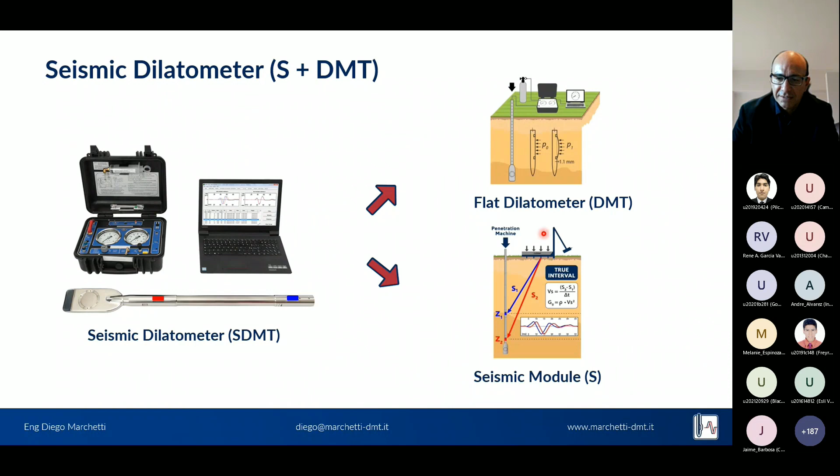Now, the seismic dilatometer I want to introduce is the combination of the flat dilatometer invented by Professor Marchetti in 1980 and the seismic module for measuring the shear wave velocity and also compression wave velocity. These two instruments can be used alone or in combination with each other, and we will see that the seismic has also been combined with the CPT.

Let's start with the DMT first. The DMT is a stainless steel blade with a flexible membrane mounted on one of its sides, which you see on the right side of this slide. The diameter of the membrane is 60 millimeters.

The test consists of advancing the blade into the soil using penetration rods for pushing the instrument and a penetration machine for advancing the instrument in the soil with pressure. A pneumatic electric cable runs from the control unit at surface into the rods and down to the blade at depth. A gas tank is necessary to provide the pressure of air, or even better nitrogen, but you can use either one. A computer may be used...

...in case you want to obtain real-time processing of the results and see the results already. If not, you can simply write them down and take the pressure readings from the control unit without the computer. Now, the test procedure consists of advancing and stopping every 20 centimeters.

As soon as the blade is advanced and stopped, initially the total horizontal pressure of the soil will flatten the membrane against the support behind it. The operator will use the valve on the control unit to inflate the pressure, and the gas that runs in the pneumatic cable will start to inflate the membrane from the inside.

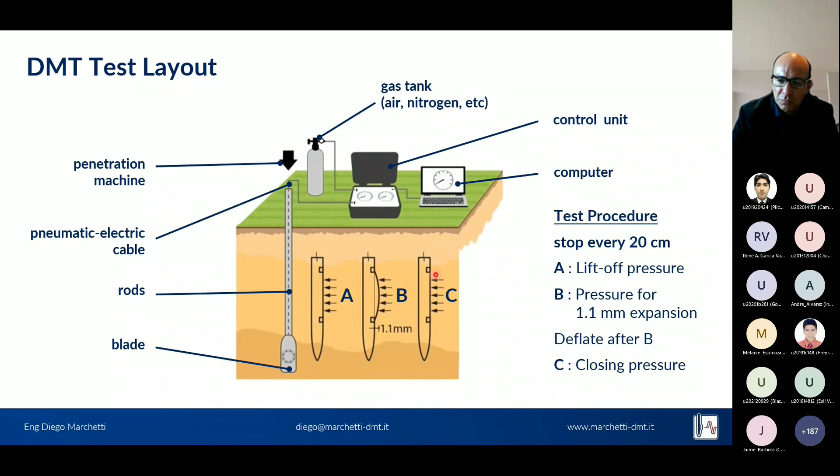The operator then has to deflate after B, otherwise the membrane will overexpand and explode or be damaged. If the operator deflates with a slow vent valve, you can take the C reading, which is very useful in sand. The C reading is when the membrane returns to its original flat position before A.

To summarize this: when we push the blade, the soil pressure is flattening the membrane. We start to inflate the gas from the inside. When the membrane starts to move, a contact goes off and the A reading is taken. The operator continues to inflate, the membrane expands, and when the expansion is exactly 1.1 millimeter in the center, the contact goes on again and the B reading is taken.

It is then necessary to deflate, the signal will go off, and when the membrane returns to the flat position at the beginning of the test cycle, the contact will go back on and the C reading can be taken.

The DMT test consists in taking 2 pressure readings, or 3 if you also do the C reading, every 20 centimeters, normally up to 20, 30, or even 100 meters.

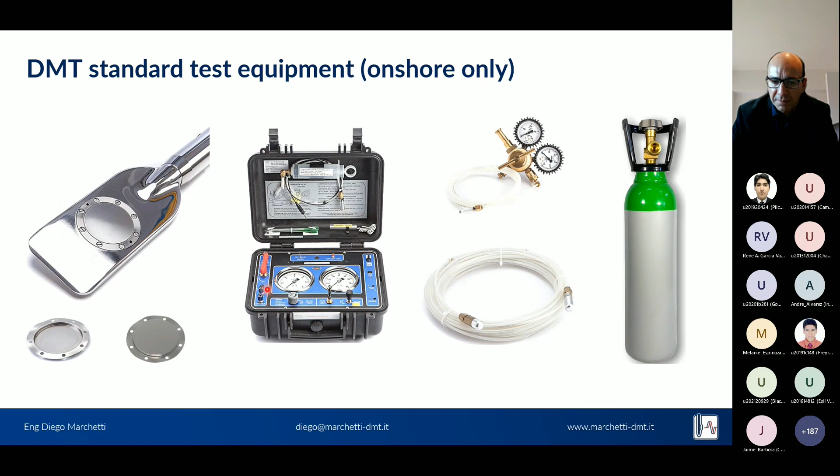This is a picture with the main components of the DMT: the membrane, which is already mounted on the blade, the control unit, the pressure regulator for the gas tank, the pneumatic electric cable going from the control unit into the rods and down to the blade.

The seismic equipment, which has been added recently also to the Medusa DMT, consists of an additional electronic board compared to the Medusa that acquires the signals from a top sensor and a bottom sensor.

The test consists in generating a shear wave at surface using a shear beam, which must be energized with a horizontal blow of a hammer against this shear beam to generate the shear wave. The shear wave will travel at depth and arrive to the top sensor and to the bottom sensor.

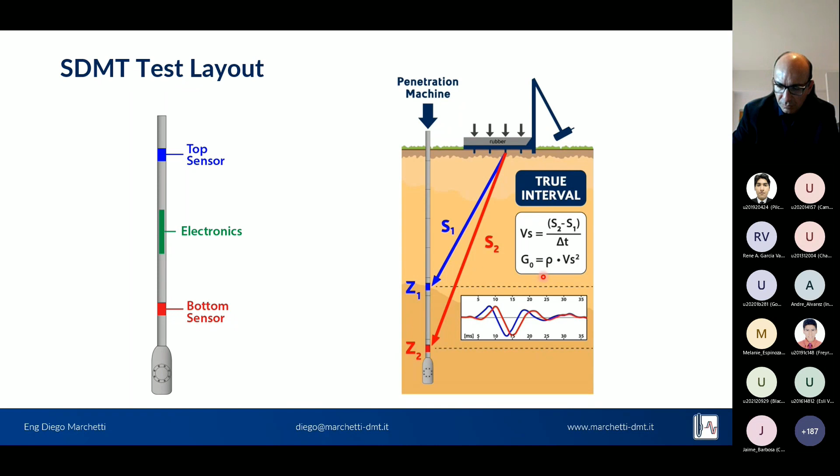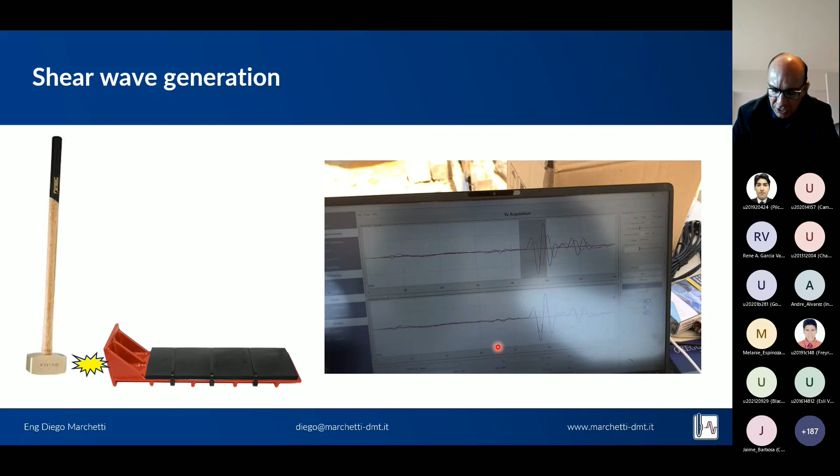Just to show you how simple it is, you have to click on the acquisition button, give a hammer blow, like in this video, and you will see on the screen the delay of the wave in the registration. The system will evaluate the delay and show you how well the delay was evaluated, superimposing the waves, and give you a real-time evaluation of Vs.

Normally, and this is what you see on the screen, you repeat 2 or 3 times so that you are sure you get a very high repeatability, which is below 3, 4, 5%. In this case, it's even less than 1%. And this is done every 0.5 meter because the sensors are spaced 0.5 meter.

The main features of the SDMT are that the execution is quite rapid because you don't need to drill a hole if the soil is penetrable, and you don't need to wait for the cementation of the hole as for crosshole or downhole. You just push the equipment like for the DMT and do the seismic test in addition to the DMT.

The accuracy of the evaluation of the delay is very high for several reasons. The first one is that the electronic board is a custom designed acquisition board that digitizes the signals so that when they are sent at surface, the data may not be corrupted and is of very high quality and free of noise. The signals are amplified and digitized at depth, so you have clear waves and a very consistent delay delta t.

But very importantly, the system has 2 receivers versus the old systems that have only 1 receiver. If you have 2 receivers, you are looking only at the delay between the waves, the same wave arriving at 2 different depths. If you have only 1 sensor, you have to record a first blow to the first sensor, then go to the next depth and be as accurate as you can to give 0.5 meter or 1 meter depth.

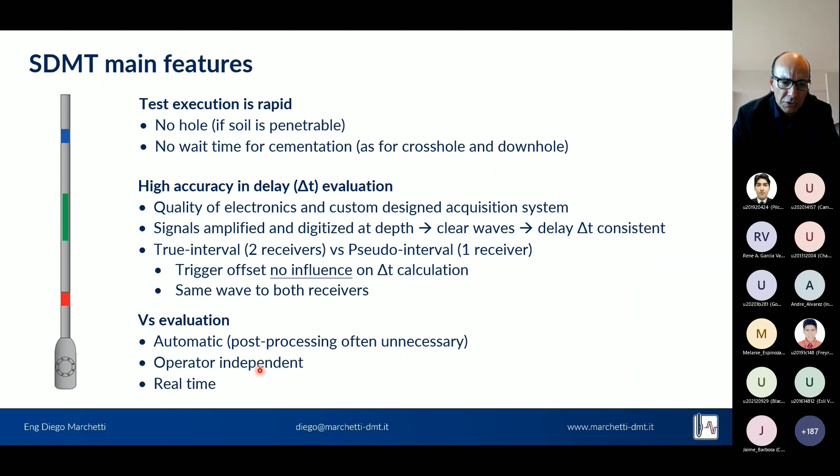The evaluation of the shear wave is automatic. Often the post-processing is unnecessary and the real-time evaluation of VS is perfectly the final value. Only if you are very close to a power station or a train station where you have vibrations, you have to use a little bit of post-processing to filter the results. But in 95% of the cases, the results you get in the field are already the final results. The test is operator independent, provided that he does the setup as explained in the training given, and the results are available real time.

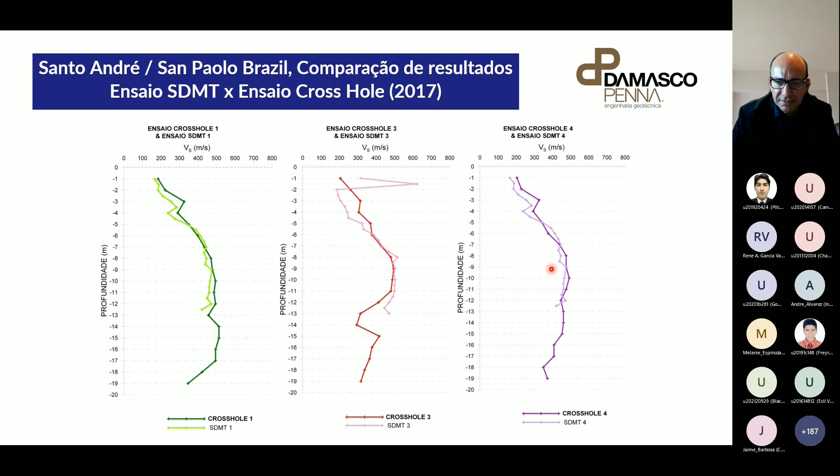The SDMT was very well accepted by the community of geophysics and shear wave velocity, to the point that we were asked to combine the SDMT, or the seismic part only, without the blade, also with the CPT. Currently we have three partnerships, and we are working on a fourth with Van den Berg, in addition to Geomil, Pagani, and Gouda Geo, to make the SDMT cone, which is the CPT with the SDMT. There is no limit in combination of the SDMT with other CPT systems, because the seismic is completely independent from the CPT measurement.

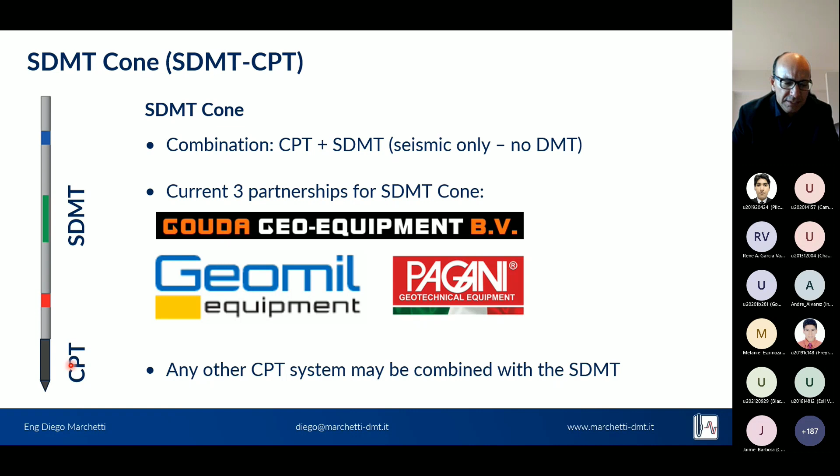Now let's look at the machines with which you can normally advance the DMT blade. The DMT can use all the machines that are used for advancing the CPT. In particular, the heavy truck penetrometer, which is the most productive because it is able to push up to 25 tons without lateral instability. Yet it is very expensive.

Additional solutions include small penetrometers, like this one used in Costa Rica, that can push the DMT. It's a lighter penetrometer, but it has to anchor, because if it pushes, it can push also 15 or 20 tons, but it would go up. So the anchors are used to get the reaction force from the ground.

The DMT or SDMT can also be advanced dynamically, only the DMT, because the seismic can get damaged if you use all the power of the hammer. But if you use only a small part of the hammer blow, you can even advance the SDMT dynamically. However, this is not recommended in extremely soft soil, because the disturbance of the dynamic will be higher and have an influence on the results. But if you use the hammer very gently, because the soil is soft, you can advance without disturbing too much and have excellent results.

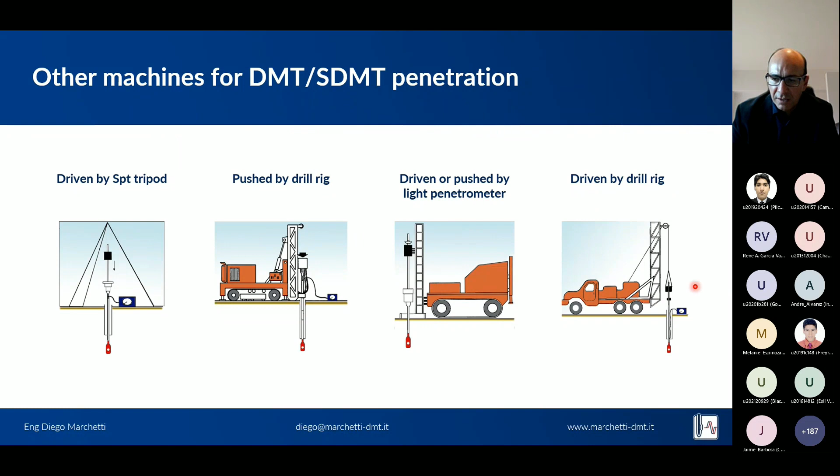Or using a drill rig from the bottom of a borehole, just like an SPT, but pushing or even dynamically from the bottom of a borehole. You can use basically any method, as long as you get the blade into the virgin soil. If you want to use a drill rig, you have to use the method called torpedo. The torpedo is the combination of a blade with an adapter, three or five penetration rods according to the capacity of the drill rig, and a top adapter for allowing the cable to pass inside the penetration rods and come out from this hole protected against a slot, so that the cable does not get damaged when it exits.

And then the cable is taped to the drill rods. So you drill a borehole to whatever depth you want. Normally you use casing to avoid the hole closing, and then you lower this connected torpedo with the drill rods, taping the cable to the rods, lower it to the bottom of the borehole and push every 20 centimeters. When you reach the full length of the penetration rods, 3 or 5 meters, you then take away the instrument, disconnect the torpedo without disassembling it.

You keep it assembled, you only get the cable and put it on the side. Then you drill, you advance the casing, and you continue with the same test cycle below. This methodology is certainly slower than the penetrometer, because you have to alternate the drilling and the measurements. But it is able to overcome obstacles because you can drill through them and continue below.

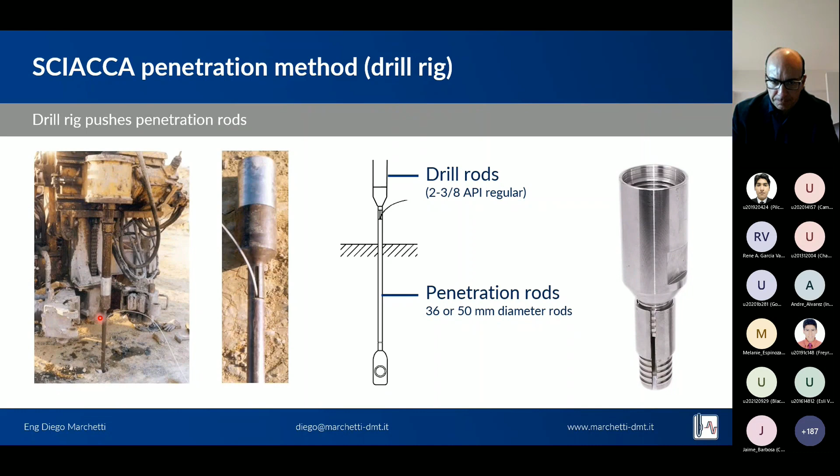Another example is to do the test offshore from a floating barge. In this case, you have the Sdmt and the seafloor hammer. This barge was anchored at the four corners with buoys. Then, using a drill rig, we did tests up to 50 meters of water, also with the hammer taking the shear waves.

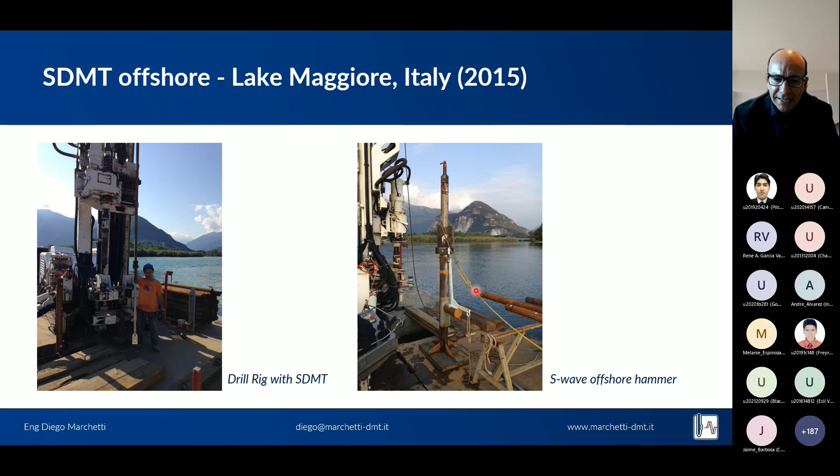Now let's see the type of soils for which the DMT and Sdmt may be employed. The DMT can be employed in all penetrable sands, silts, and clays, where the grains of the material are small compared to the diameter of the membrane. This means from very, very soft soils with low values of strength and moduli, up to hard soils, up to almost soft rock with high values of strength and moduli.

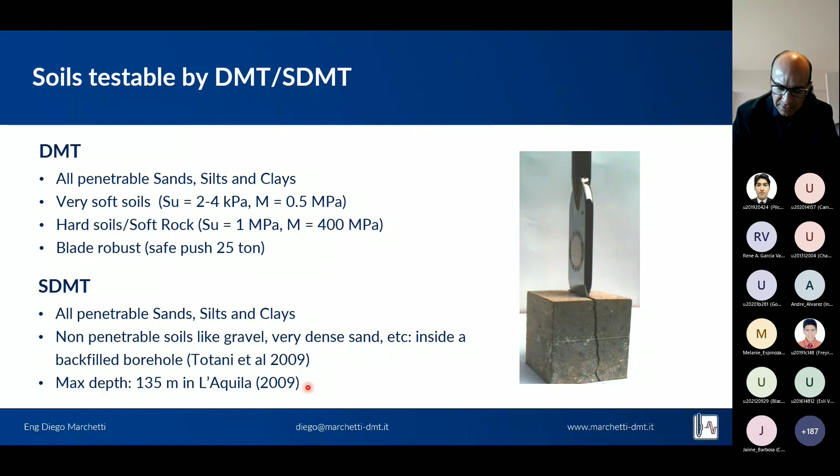The max depth we reached was 135 meters in the town of L'Aquila in 2009, after the terrible earthquake that occurred. Now let's look at the interpretation of the results, first of the DMT and then of the seismic.

So we said that we come from the field with DMT readings that are 2 or 3 pressure readings every 20 centimeters. How do we obtain geotechnical parameters for design? How can we use this information?

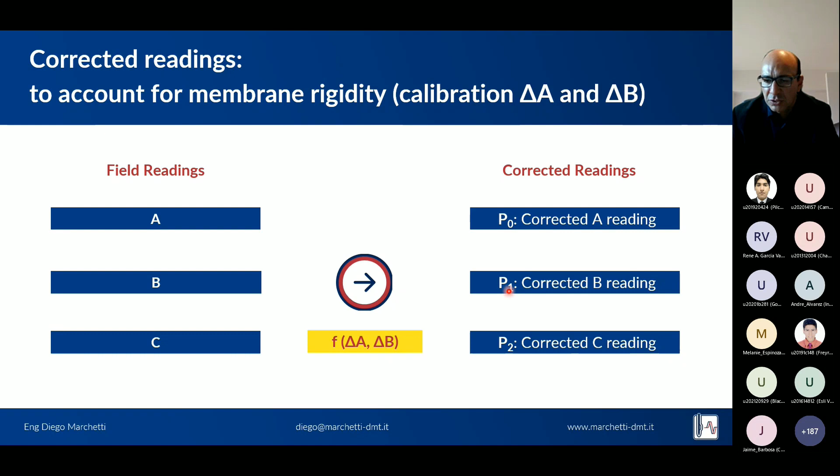The first step is to apply to the field readings the correction of the membrane. The membrane has a rigidity, and through a calibration that evaluates delta A and delta B, which are basically A and B readings out of the ground. I'm not going to go into this technical detail, but you correct the A, B, and C so that you eliminate the steel rigidity of the membrane and get the clear corrected readings of A, P0, B which is P1, and C which is P2.

The second and most important step is the definition of 4 intermediate parameters. The nice thing is that each one of these already has a meaning related to the soil: the material index for information on soil type, the horizontal stress index KD which has information on stress history and horizontal stress, the dilatometer modulus which is related to the modulus you can use for settlements, and the constrained modulus that we will see in the next slides, but it's not directly usable ED, though it is a modulus.

I will explain this in the next slides. And UD, which is a parameter coming from the C reading, the corrected C reading, is used for distinguishing between

drained and undrained soils. Now, the second step, or the third step, the most important, is to use correlations, not definitions, from the intermediate parameters to the final interpreted geotechnical parameters that we know well because we use them in soil mechanics. These were obtained by Professor Marchetti when he went all over the world to many research test sites that were very well documented.

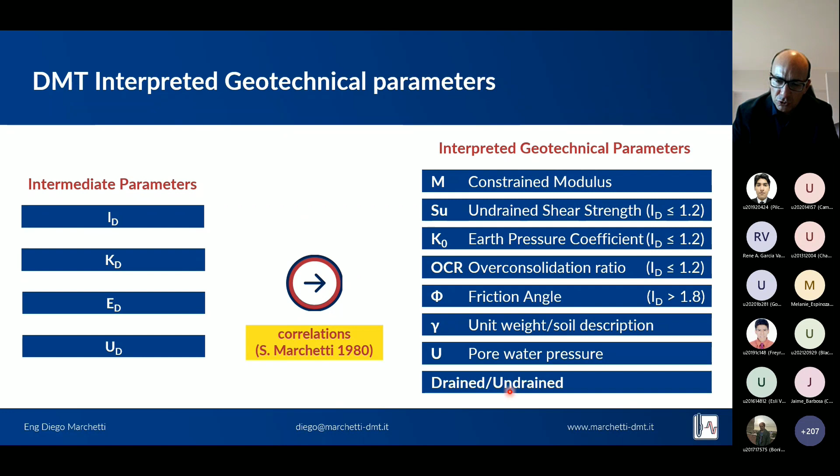So he constructed and processed the best correlations to these parameters using the information contained in these four intermediate parameters to get the constrained modulus M, the undrained shear strength in clays, the earth pressure coefficient in clays, the overconsolidation ratio mainly in clays (ID less than 1.2 indicates clay or silty clay), friction angle in sands, unit weight and soil description in all soils, the pore water pressure in sand, or excess pore water pressure in clays, and distinguishing between drained and undrained materials. So a lot of information, and I will show you how this is obtained.

Now let's look at the intermediate parameters. ID contains information on soil type, and you will see this because if you do a test and you do the A and B readings, or P0 and P1, you will see that the ratio P1 over P0 is about 1.1 to 1.3 in clay. Whereas if you are in sand, the ratio is about 2.5 or even more. In silts, it is somewhere in between. So ID has been defined as P1 minus P0 normalized to P0 minus U0, and it distinguishes very well between clays, silts, and sands.

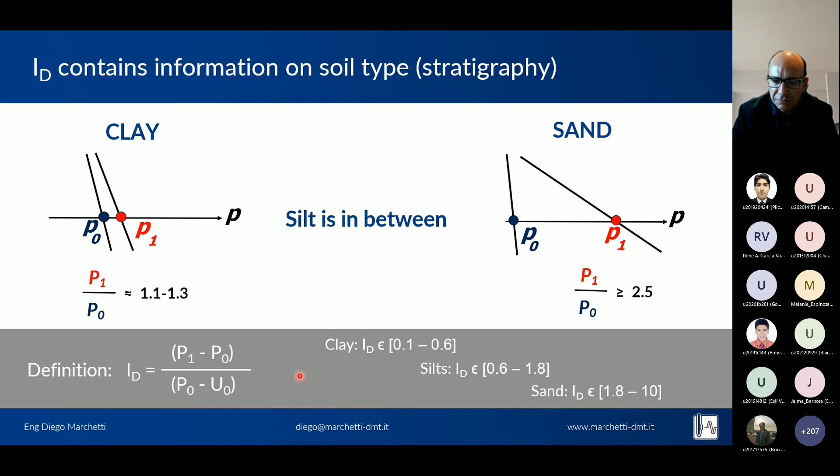The second intermediate parameter is KD, the stress history index. The formula is the same as for K0. P0 is basically the total horizontal pressure of the soil against the membrane minus the water pressure, so it's the effective horizontal pressure, divided by the effective vertical pressure. So that means that KD is equal to K0. Unfortunately, it's not true, because you have penetrated with the blade and created an extra horizontal stress, so P0 is not the total horizontal stress.

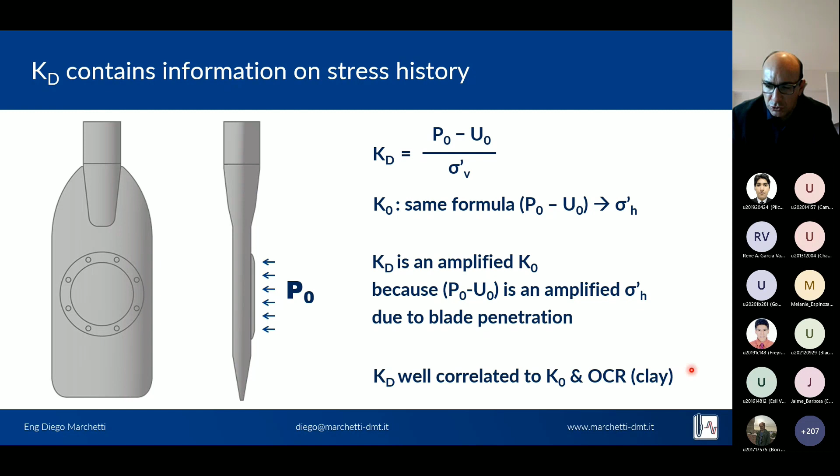However, in clays, this is the closest measurement you can do to get K0, and KD is very well correlated to K0 and OCR, and I will show you this in clays. In sands it's not so simple, and I will talk about this later. So when you are in a normally consolidated clay, KD is equal to the value of 2 - it's not small in general, it's equal to the value 2. In over-consolidated clays, the value is higher, and the higher it is, the higher is OCR.

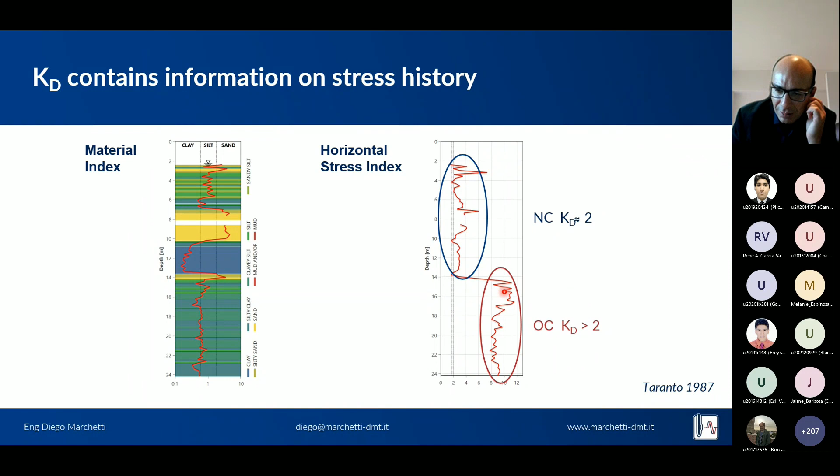Let's look at an example. This is a test site with silt, sand, and clays, and then a clay, a silty clay. You see in the top part, KD is very close to 2, and this is a normally consolidated layer of these different types of materials. And below 14 meters, KD is much greater than 2, indicating this well-known over-consolidated silty clay.

Professor Marchetti, using experimental data he collected in the 70s, published this formula in 1980 as a function of Kd to obtain OCR. There are several publications, among which this one in 1995, 15 years later, showing very good agreement between the correlation obtained from Marchetti in 1980 and the best fit of many other additional points.

You see that the best fit line, this continuous curve, is very close to the dotted line, indicating good agreement. Additional validations were obtained through theoretical publications by Finno and Yu, showing again very good agreement for this correlation between Kd and OCR, using very advanced and sophisticated models of the soil.

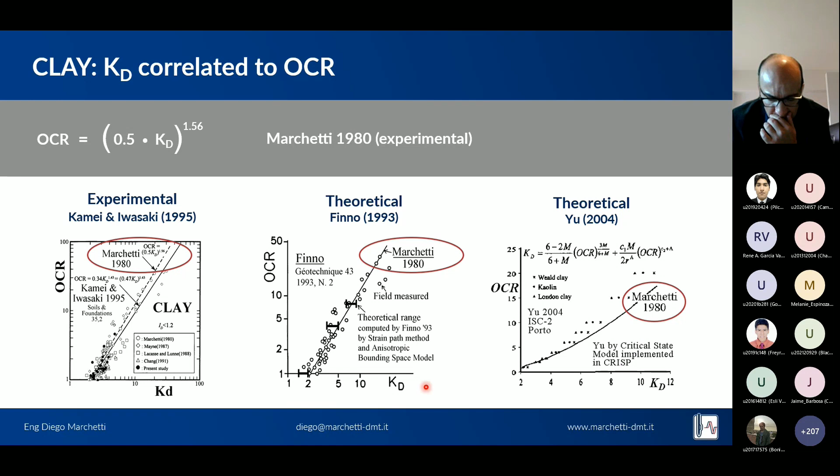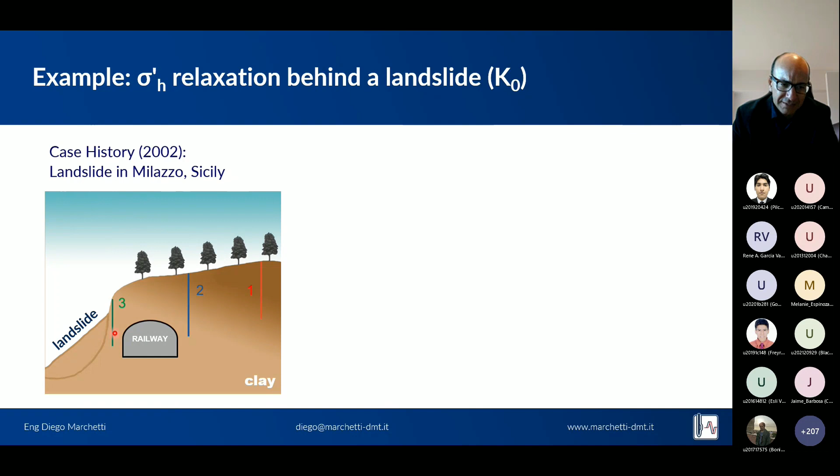The third intermediate parameter is ED, which is defined from the theory of elasticity. It's the elastic modulus obtained from the horizontal load test performed by the membrane expansion. With this well-known geometry, and accepting the elastic theory detailed in this publication, you obtain this formula: ED equals 34.7 times P1 minus P0.

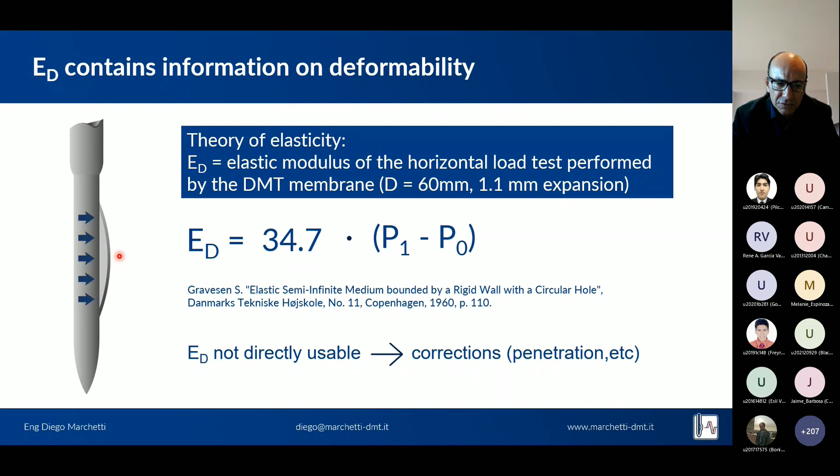This modulus is not directly usable for many reasons. First, it's in the horizontal direction, not the vertical. Then the soil is disturbed because you penetrated with the blade - certainly you disturb less than with any other equipment, but you still disturb the soil. And finally, it is an undrained modulus, at least in clays, while the constrained modulus is a drained modulus.

So the final constrained modulus you get from the DMT is obtained from ED, the dilatometer modulus, corrected with ID and KD, because the soil type provides information on the amount of drainage, in order to fill the gap between ED being undrained and M being drained. The correction on ED is different if you are in sand, clay, or silt. And KD is the stress history or horizontal stress, which helps fill the gap of information between horizontal and vertical stress.

So these three ingredients are well used in the formulae found by Professor Marchetti to use all the information available with the DMT to estimate the constrained modulus. There are many publications in literature showing excellent agreement between the constrained modulus M obtained from oedometer data and from the dilatometer.

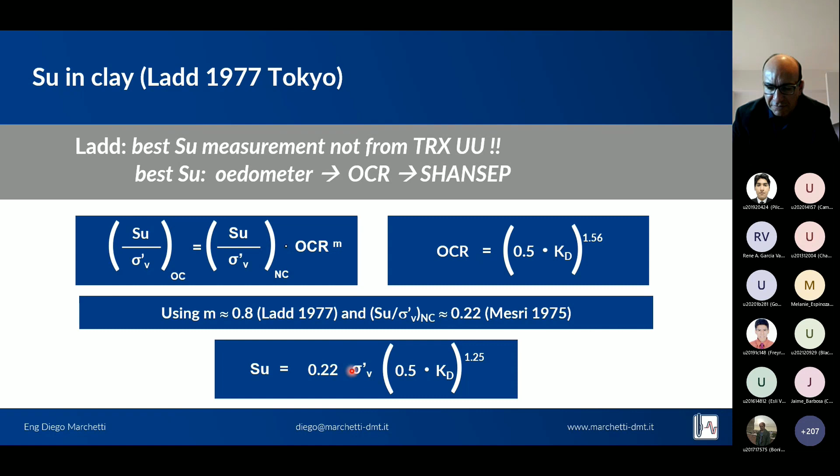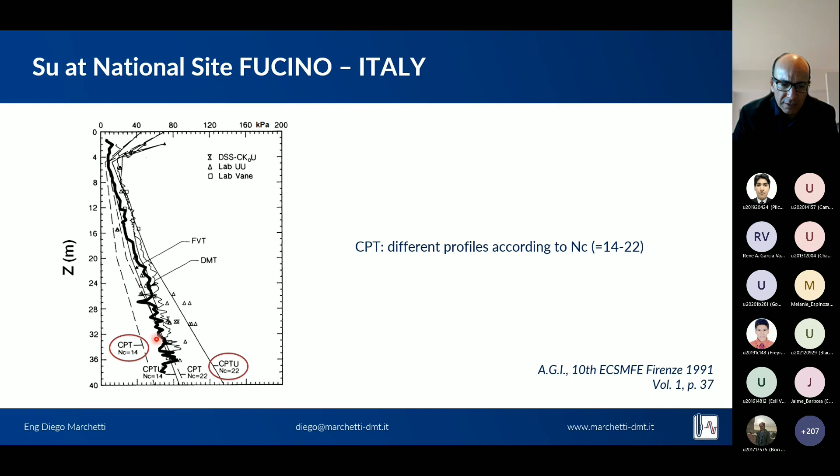This is the research test sites in Italy, where you see the various interpretations of SU from laboratory and from field vane tests, and also from the CPT, where according to the NC value, you have these different profiles. The DMT, fortunately, does not require any type of correction, as shown by the formula I just presented.

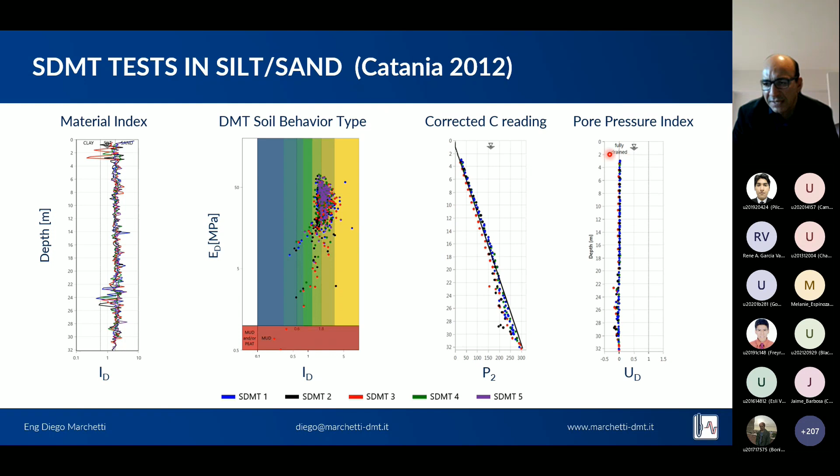Now let's look at the last measurement you can do with the DMT, at least with the standard equipment. With the Medusa you can do some others, but we don't have time to look into them. The idea is to do a dissipation test for estimating the coefficient of consolidation and permeability in clay.

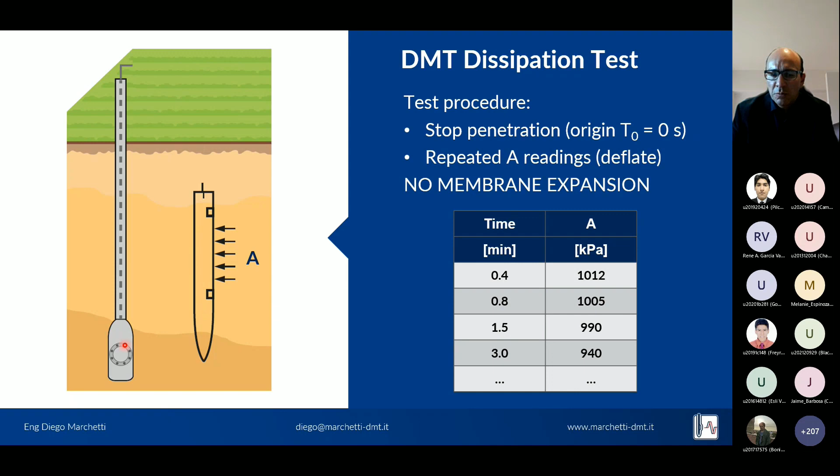The test consists in advancing the blade just like a normal test reading, and you stop. At that moment, you have created an extra water pressure due to the insertion of the blade, which increases the horizontal pressure, and in clays creates an extra water pressure. So the time starts when you arrive at the test depth, and you repeat only A readings, which are basically the total horizontal stress, without expanding the membrane. So you have time and A, and the blade is not moving, of course. We already created the excess pore water pressure. We want to see how fast the water dissipates.

So if you take the readings at double the time, because the scale is a log phenomenon, it will design an S-shaped curve and create a flex point that has been correlated to the coefficient of consolidation, as you can read in the publication of Totani et al., many years ago, and now it is well accepted. From that, you can obtain also the coefficient of permeability, KH, as a function of CH, gamma water, and of course, the modulus that you can get from the DMT.

You can do the test also with the cone, of course, and we compared several dissipations, but the main difference is that, first of all, you disturb the soil less with the penetration of the blade. Second, you don't measure in one point, but in a larger area, like a small embankment. So it's very similar to the consolidation and permeability of a small embankment in front of the blade, which makes it reliable because it's not only a single point, but an average of the bulb of soil involved in the membrane surface.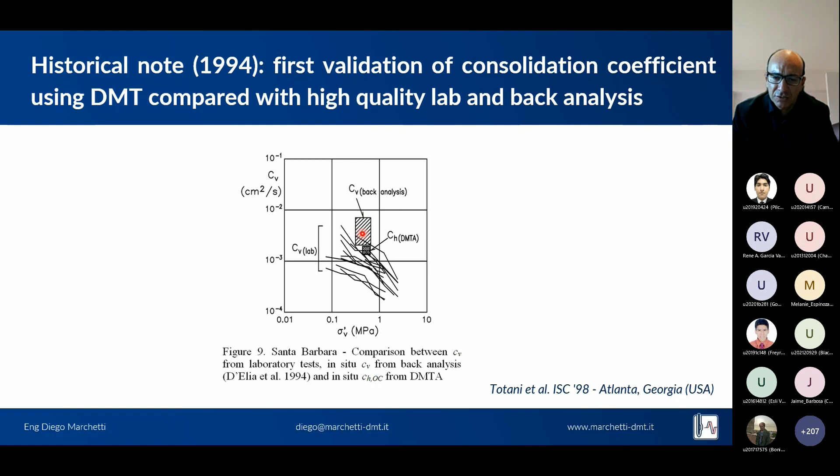As a historical note, let me show you comparisons of this CH with laboratory results of high quality in this real case project that has been published, along with the back calculation after the construction, showing excellent agreement between all 3 values.

Today, with the automated Medusa, we don't need to take only points. We have full continuous, very high resolution A readings, and we get the full curve automatically without needing to take the readings manually. And from that full curve, the flex point provides you the coefficient of consolidation, and from that, the permeability.

The DMT is encoded in the European standards according to Eurocode 7, the ISO standards since 2017, and American standards since 1990, with several revisions and updates. The most complete document is this TC16, named because it was written by the Technical Committee 16 of the International Society of Soil Mechanics and Geotechnical Engineering. Today this committee is called TC102, but the document is still called TC16. It contains 41 pages on the testing equipment, test procedures, and processing of results, most of which I addressed in this presentation.

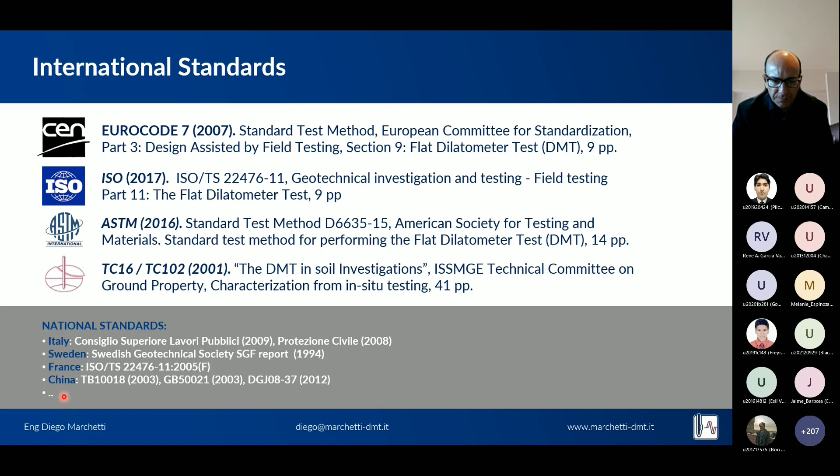Now let me show you some results to get confidence with how to read the graphs you obtain for geotechnical design and applications. Here we are in a test with clay near the airport, Fiumicino, where they constructed the new exhibition center, but not quite well. We are inside the pavilions, where we did a test. The reason for the test was that they had a lot of problems because they put the perimeter on piles and then did not do a good job for the rest—they dug out and put gravel, but I don't have time to go into these details. I just want to show you the results.

These are the P0 and P1 readings, so maybe you can already predict we are in clay mainly because the readings are close to each other and not far apart. Maybe here we have some sand, but we'll see this later in the intermediate parameters. These are the field readings corrected with the calibration. The C reading shows the excess pore water pressure in clay, and you have some nice sandy layers that also define your hydrostatic water line. This is the unit weight obtained with the chart I showed you before. So this is the input and field readings.

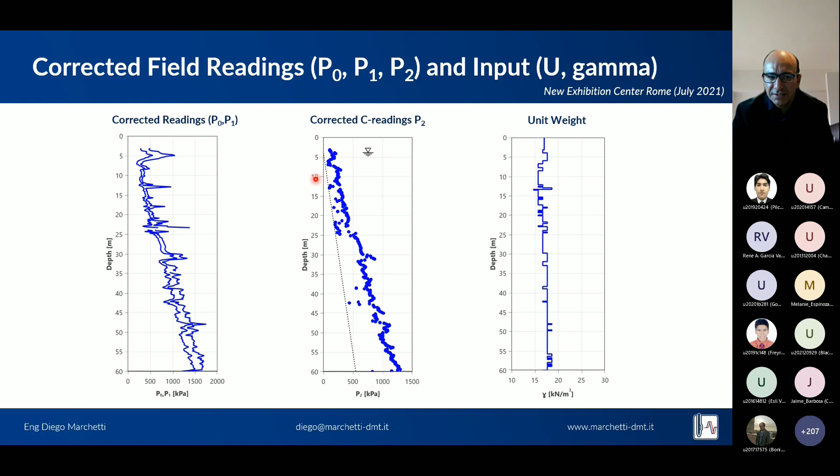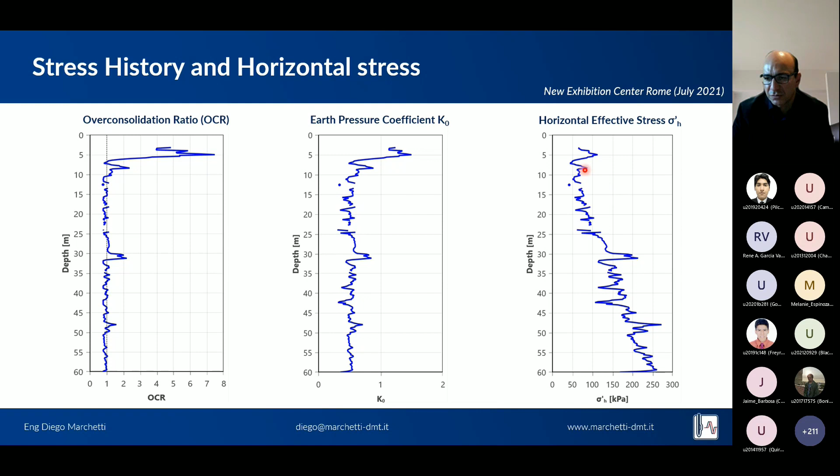We also did a dissipation test at 35 meters, and in this case it was very slow because it's clay, as you know from the profile before. T-flex is around 100 minutes, and this gives the coefficient of consolidation and permeability.

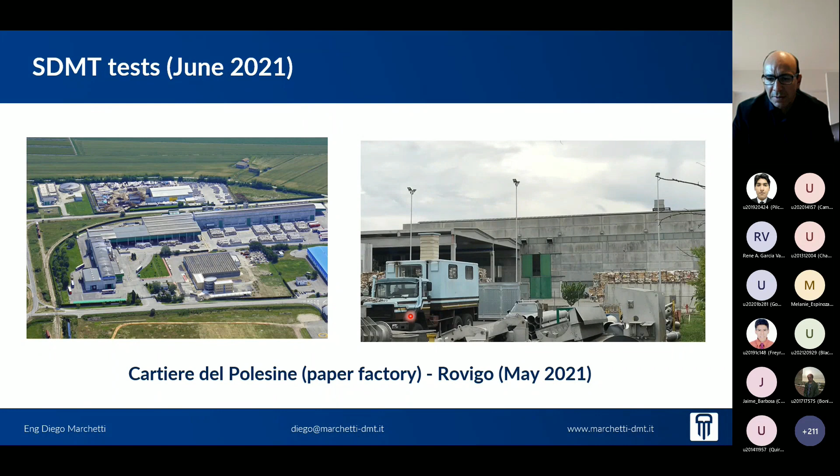Now let's look at an example of these tests in clay, silts, and sands, not only mainly clay. This is a paper factory in the northeast of Italy. They have to construct another building in this area, so we went with our truck and did the SDMT tests with the Medusa.

KD is greater than 2 in the sand, so probably the sand is quite dense, and the clay is mostly normally consolidated because it's equal to 2. And the dilatometer modulus, the one we have to correct to obtain the constrained modulus, and again the UD, where we have UD equal to 0 it's fully drained behavior, and where we have higher values it's undrained.

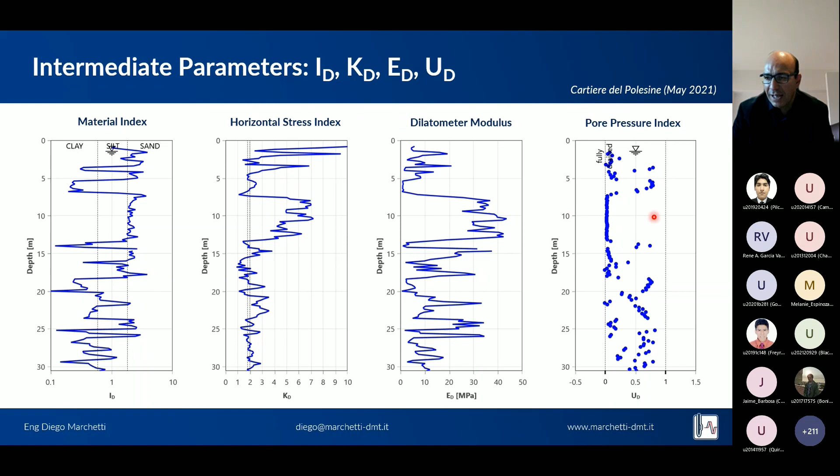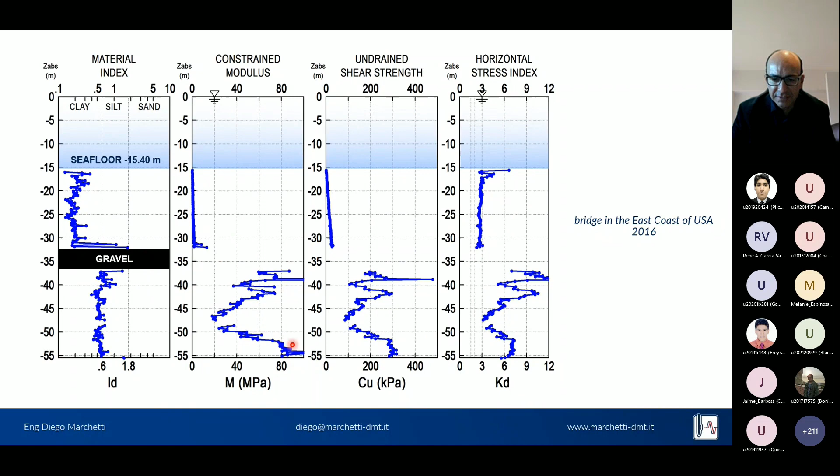This was a test in the northeast of America, for a bridge project. This was the seafloor system, with a seafloor hammer for generating the shear waves. As you see, the soil was very soft for the first 15 meters, and then there was gravel that we had to drill through and go on below for a silty clay that had this profile with the DMT.

The nice thing was that they did also tests with the pressure meter and with the CPT. They actually calibrated the alpha value of the CPT using the DMT and the pressure meter. And here you see an excellent agreement between the tests for the modulus and also for the undrained shear strength.

Now let's see what are the main differences between the DMT and cone-shaped probes like the SPT and CPT. For the CPT, one of the first differences is that the test is performed during what should be a fixed penetration rate of 2 centimeters per second, which means you have to impose, monitor, and make sure you are respecting it. This requires necessarily a penetrometer, and the penetration rate, if very different from 2 centimeters per second, can influence the results. For the DMT, there is no specific requirement on penetration rate because the measurements are performed when the blade is not moving, so it doesn't really matter how fast you go to the test depth.

We are doing advanced research for a small family of silts where this statement is not true, because it's a partially draining material. So it's a small family of silts, and if you go fast you get higher readings, if you go slow you get lower readings. But in clays and sands, silty clays and silty sands, and most silts, you don't have influence of the penetration rate, and the measurements are independent of such rate.

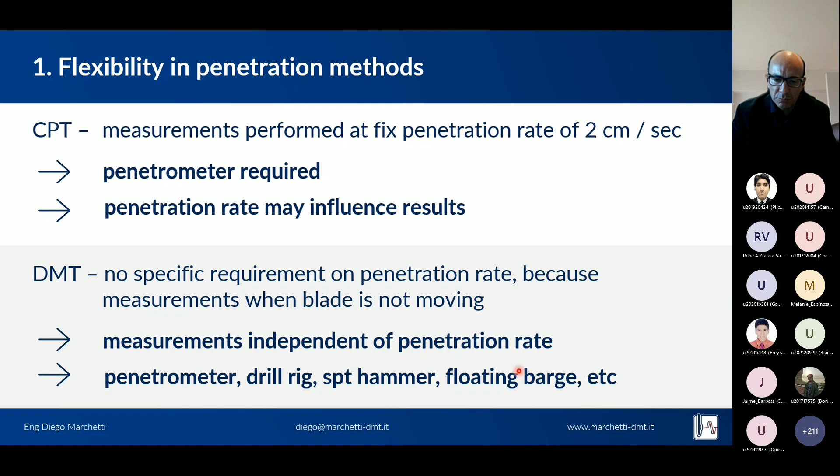A second important difference between the DMT and the cone-shaped probes is the disturbance. When you penetrate with the cone, you disturb the soil because you fail it. With the blade, you cut it and only slightly disturb what will be in front of the membrane. So the DMT during penetration preserves better the original state of the soil, meaning soil parameters are more representative and do not require a correlation to fix from this damaged soil back to what was the original natural soil.

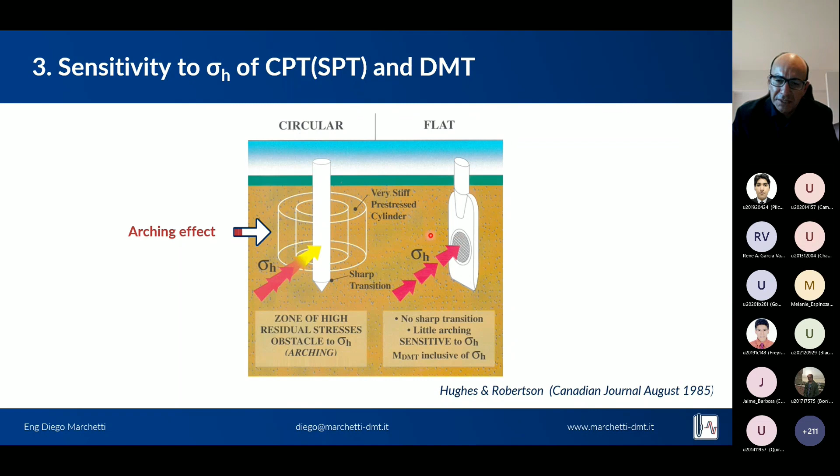Another important point is the horizontal stress. As published in the Canadian Journal, when you penetrate with a circular probe, you generate a very stiff pre-stressed cylinder, coming directly from the well-known arching effect, like in tunnels. But here it is an obstacle to the horizontal stress, because this stiff pre-stressed cylinder does not act on the shear or the friction sleeve of the cone, making it very insensitive. The relation between width and thickness of the blade is such that arching is very small in the rectangular section of the blade, so there is very little arching. Furthermore, we measure the soil in the horizontal direction, capturing completely the total and effective horizontal stress.

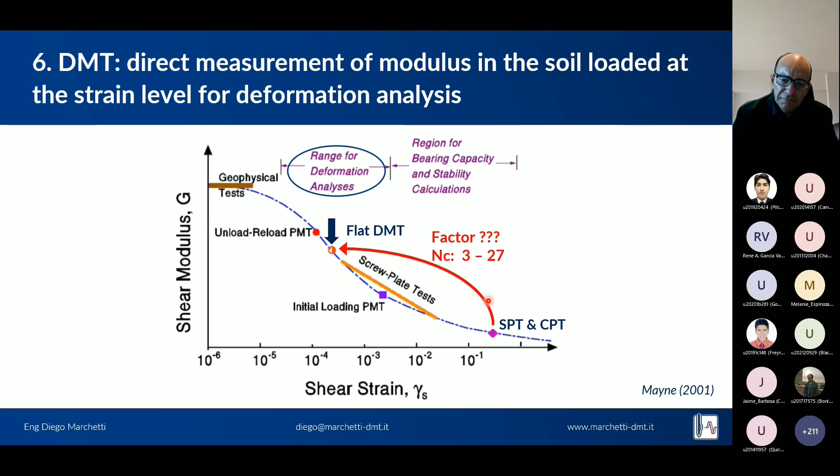But then, to obtain a modulus, they have to find a way to estimate a factor for that. Now this concludes the initial part of the presentation concerning the equipment, test procedures, and interpretation of the results. Now I would like to address several applications for which the DMT is used worldwide in everyday projects. The reason is not to tell you that the DMT can solve all your problems, but to show you how people use the results, so that if you have similar projects and a DMT profile, you know what was already done by others.

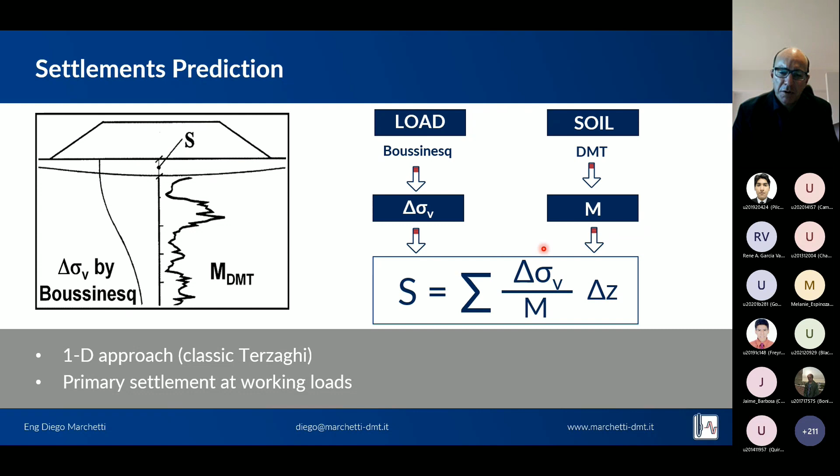The first application, and by far the main application for which it is used, is for the modulus, for example for settlements. We all know that a settlement is obtained from the load, where we could use Boussinesq to evaluate the excess stress caused by the load, and the modulus we can obtain from the DMT, and even with a very simple monodimensional formula, we can get a very average value of the settlement. Professor Marchetti used to say it's better to be approximately right than precisely wrong. So a simple monodimensional formula, instead of precisely wrong with decimals and many expressions accounting for secondary factors, when maybe we make a mistake with the modulus m because we estimate it wrongly, and then have a very big error due to the modulus.

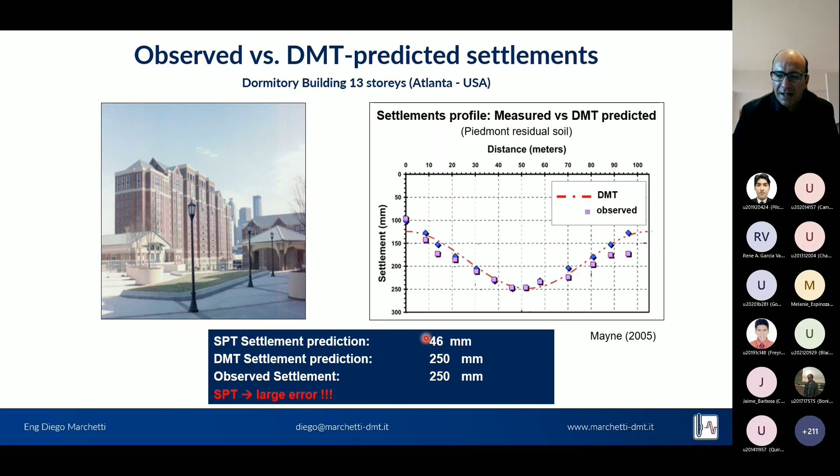You will find in literature many case histories showing very good agreement between the measured and DMT predicted settlements or moduli, and these are examples of publications. Just to show you a few, this is a comparison of observed versus DMT predicted settlements, showing very good agreement of the observed settlement with the DMT curve, where the SPT predicted a very unconservative value. Even though if you read the paper, you will see they made even a mistake in using the modulus, but definitely the SPT contributed to a very incorrect value of the settlement evaluation.

This is another collection of 107 projects where this user of the DMT published in Budapest at the last ISC International Site Characterization Conference, more than 100 projects where the DMT test data saved the owner money over the previously overly conservative design based on less accurate tests.

So basically, with SPT, they predicted they would have to do deep foundations. With the DMT, they predicted a higher modulus and were able to do shallow foundations instead. This is the sum of the saved values across all these projects.

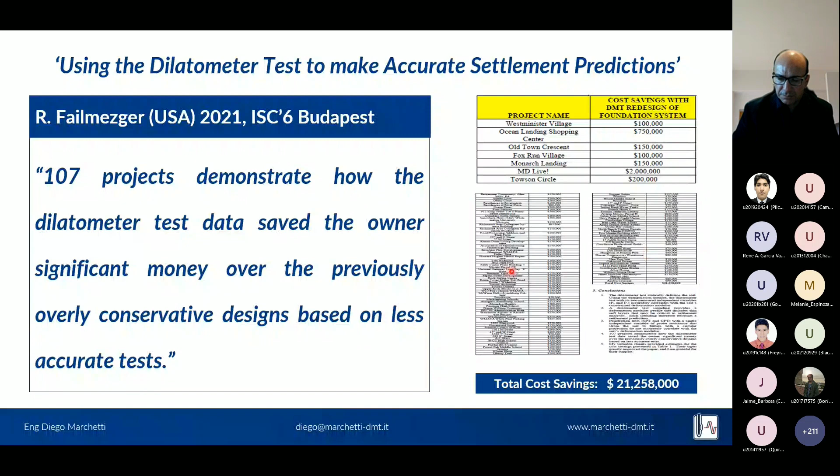Now, to show you an example, these were tests performed in Bogota, Colombia, in 2015 at the Escuela Colombiana. Some of you may have been present at the time, while myself and Professor Robertson were doing presentations similar to this one inside the main hall, while outside they were doing tests with the drill rig and with the DMT and SDMT equipment.

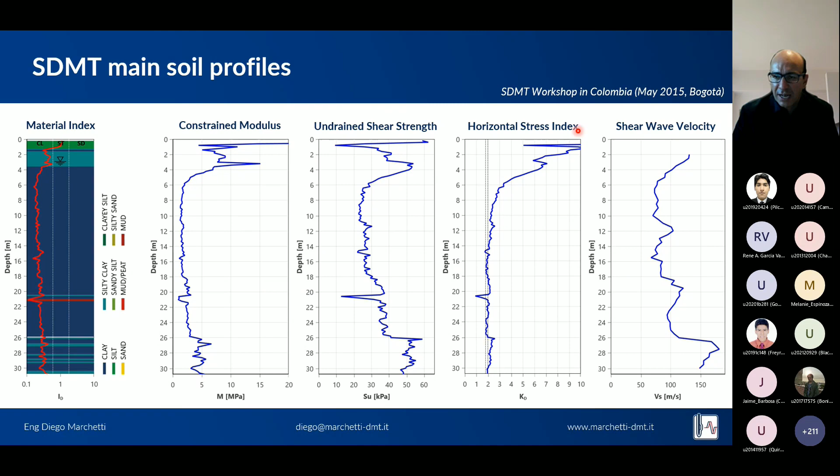The KD had a value of 2 from 8 meters onwards and much higher at the surface. This was the shear wave velocity. As you see, there is a very dense top crust in the first 8 meters, and that's why OCR and K0 are very high. Then in the clay, OCR is equal to 1 and K0 is again equal to 0.5, which is typical of normally consolidated clays.

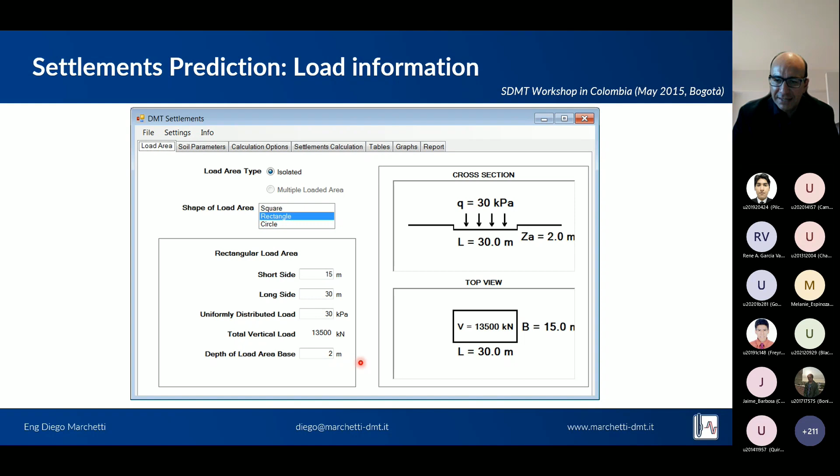We decided to do an example of settlement prediction with a rectangular area, using software that is free, provided by us online, where you define the load area, in this case a rectangle with these dimensions and this uniformly distributed load, with the base dug up for the first 2 meters. Then you can import the soil parameters, in particular the modulus every 20 centimeters, and immediately get an evaluation of the estimated settlements in the center, the 4 corners, and the median sides.

You can also access the graph where you have the modulus from the DMT test, the Boussinesq evaluation of the increase of stress from the 2 meters that we dug out, and then the resulting deformation. From that, if you integrate the settlements, you obtain a settlement at the top of 225.5 in the center of that load.

Now, let's look at another application, G-gamma decay curves. We already saw the graph of the decay of the modulus G with strain, and we already saw that the DMT provides a modulus in this area. So with the seismic test, we have Vs and therefore G0, giving us the first initial point.

Using that, along with the DMT modulus, we can try to estimate the curve. If we have a low ratio of G0 over M, it means the curve is more like the top curve. If we have a high value of G0 over M, then the curve will decay quite rapidly.

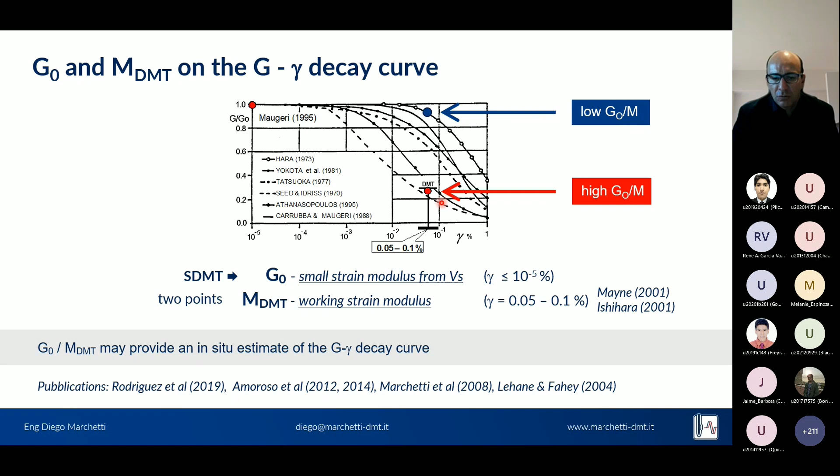There have been several studies on this, and Dr. Sara Amoroso published this research in 2014. She worked with several test sites, using intersection because she knew G0 from laboratory, and found the gamma from the DMT at certain points.

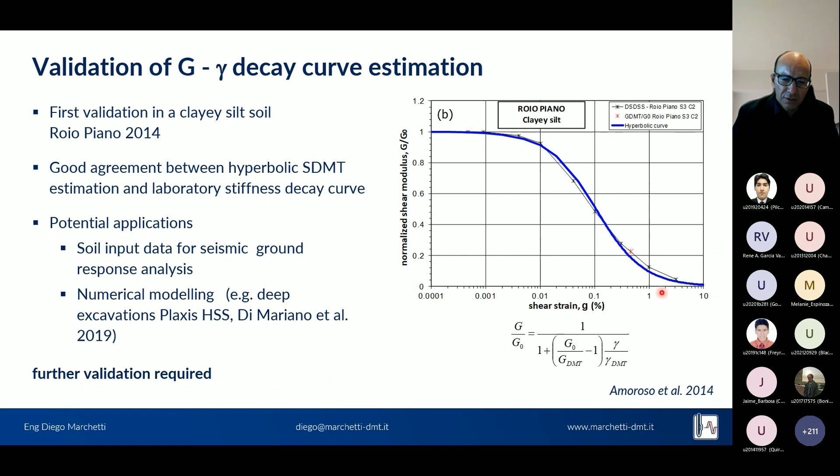We don't have time to go into this, but the first validation curve worked very well. Additional work will be shown maybe later in this presentation, and of course further validation is required. But yes, it's a very interesting application, especially for numerical modeling programs like Plaxis that require this type of input.

Now let's look at another application for which the DMT is used. The DMT has been increasingly used in compaction jobs to quantify the gain of soil improvement, be it ground reinforcement, ground improvement, or ground treatment. The first publication was in 1994 by Professor Van Impe et al. They tested before and after vibrocompaction and saw that KD increased 4 times, while the modulus M increased 10 times in the compacted area. The nice thing is they showed the compaction was efficient only up to 8 meters, because below that the profiles were the same.

Another example, in the United States, a project at a school did resin injections and wanted to check that between 1.5 and 3 to 4 meters, they had an improvement of the soil in terms of KD and M.

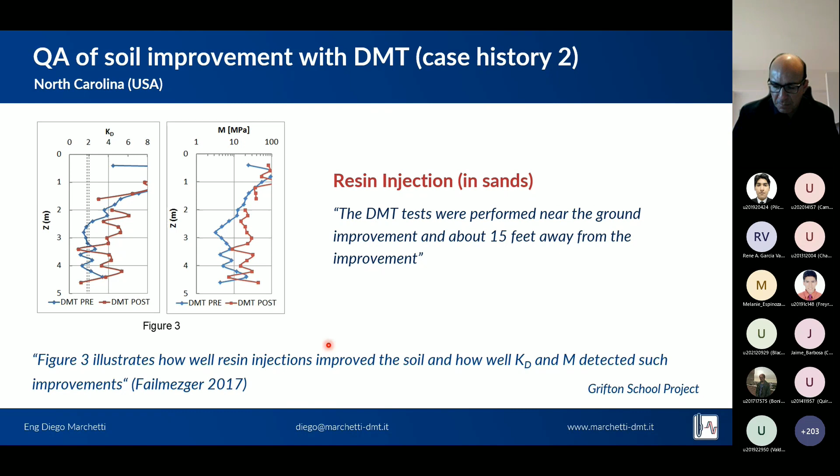Another example is on this island in Dubai. You may have heard of the Palm artificial island, created with land reclamation techniques, with ships pumping sand and then compacting it. They wanted to ensure the sand was well compacted, so they did DMT and CPT tests and obtained the profiles. Unfortunately, they had not done the test before compaction, which is best practice, but only after.

In that case, you may read papers showing that the ratio between modulus M and QT from the cone provides a technique for evaluating compaction quality: where this ratio is above 10, it indicates high quality compaction, and where it's below 10, the compaction quality is poor.

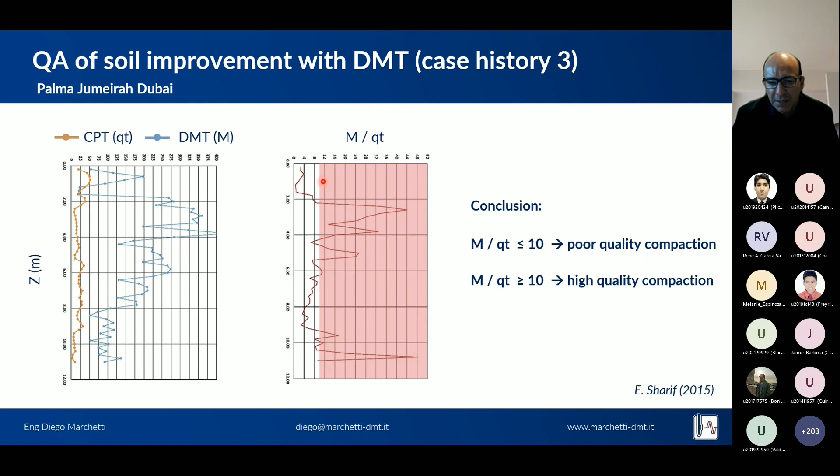So, as a rule for good practice in quality assessment of soil improvement: when possible, do DMT and SDMT before and after treatment, so you can compare profiles of KD, M, and also VS, to see changes in the small-strain modulus G0 before and after treatment. When you cannot perform the test beforehand because it's too late, do both DMT and CPT and look at the ratio M over QT, which must be higher than 10 or 12.

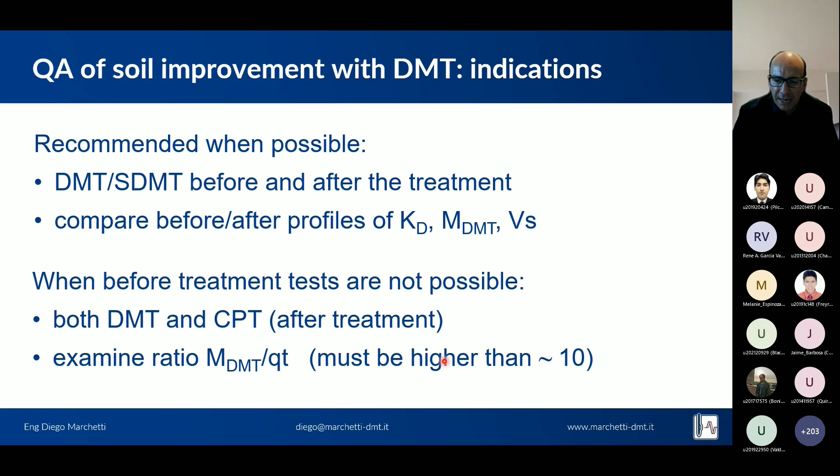Another example I want to address, in case you encounter it in your area, is slip surface detection in over-consolidated clay slopes. When there's a sliding, the slip surface remolds and reconsolidates under its own state. So if you do a DMT test in an over-consolidated clay slope, you'll generally find a high KD value. Then, corresponding to the slip surface, you'll find KD equal to 2 -- not a low value, but KD equal to 2, because it reconsolidated as a normally consolidated clay. It may then continue with healthy over-consolidated clay below it.

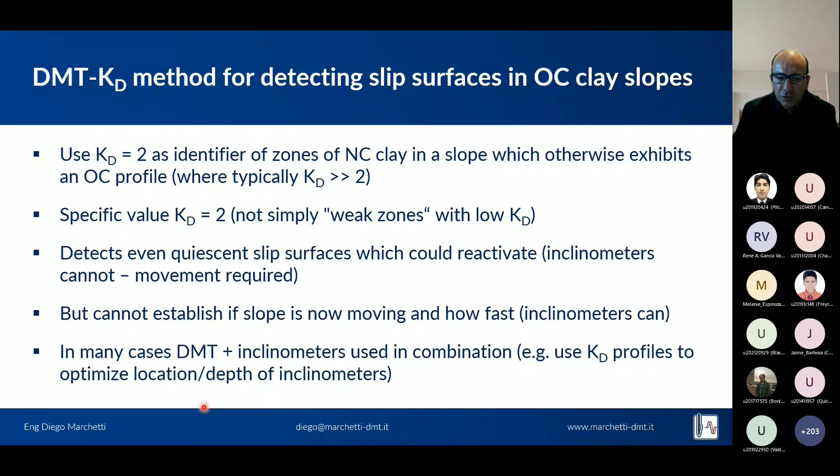This procedure was very well documented; I already summarized some of this commenting on the previous slide. Basically, you can detect slip surfaces that are quiescent, which could reactivate. This is something you cannot do with inclinometers, because inclinometers can only monitor if slides are moving, which the DMT cannot. But the DMT can detect a quiescent slip surface or one about to trigger. So in many cases, DMT and inclinometers are used in combination, or KD profiles are used to localize the inclinometers. This is another published example of a real case project.

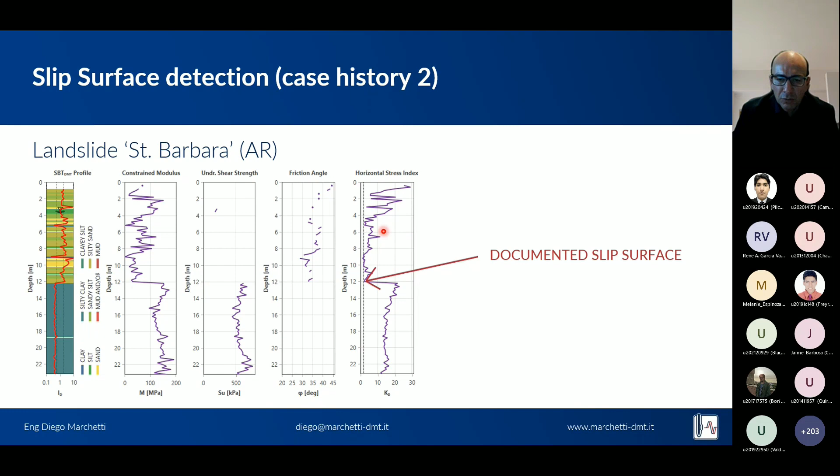You see high over-consolidated clay above and below, and where KD equals 2, you have a documented slip surface. Another example: you see normally consolidated clay, over-consolidated clay below 12 meters, and many values of KD equal to 2, because this was heavily remolded with multiple landslides above.

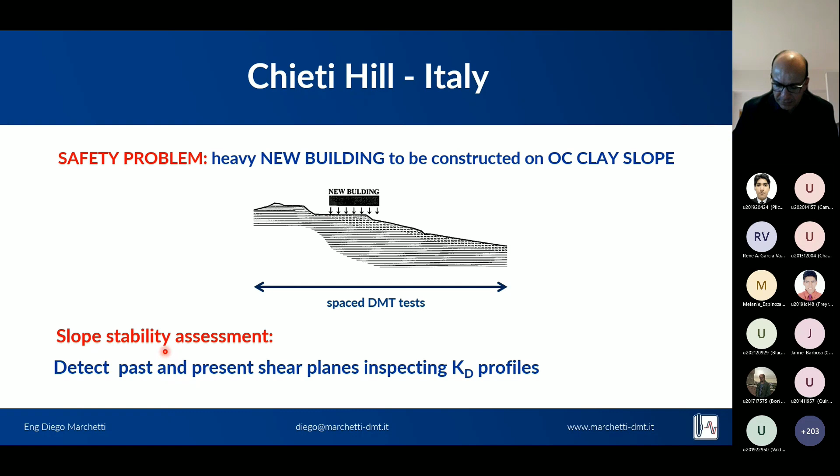There was a project in Chieti Hill, a very important one, because a new building had to be constructed on an over-consolidated clay slope, and there were several uncertainties on the slope stability. So they decided to repeat many DMT tests, not only where the building had to be constructed, but also above and below. They found that above all the landslides, KD was much greater than 2, even greater than 4 and greater than 6. Where there were the landslides, many values of KD equal to 2 indicated the affected clay area due to the many landslides.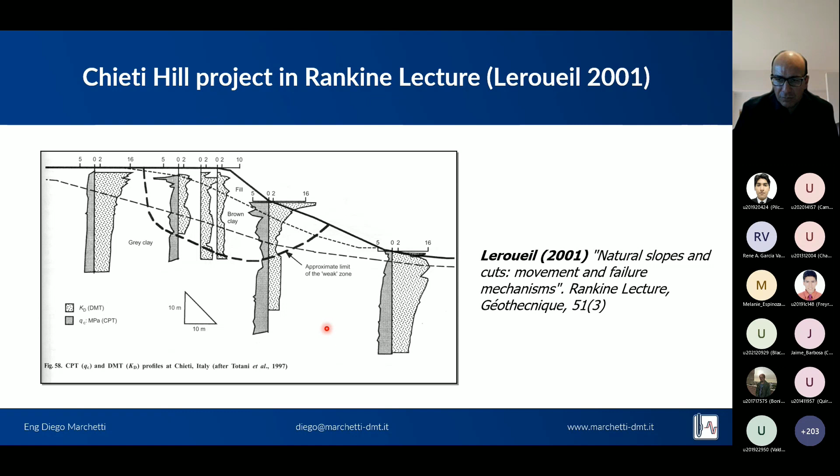On the rightmost side of this area, they found additional healthy clay. This project was then mentioned in an important lecture, the Rankine lecture, where they referenced exactly that Chieti Hill case I was talking about, and mentioned the Totani publication in 1997. So it's a very well accepted method for the detection of slip surfaces.

Now let me show you another possible application, which is the design of laterally loaded piles, in particular for the estimation of the PY curves. The original stimulus for developing the DMT was to obtain tools for measuring parameters for the design of laterally loaded piles. When Professor Marchetti was a consultant designing piles, he felt that he had no instrument to monitor the horizontal stress. There are similarities between the DMT and laterally loaded piles.

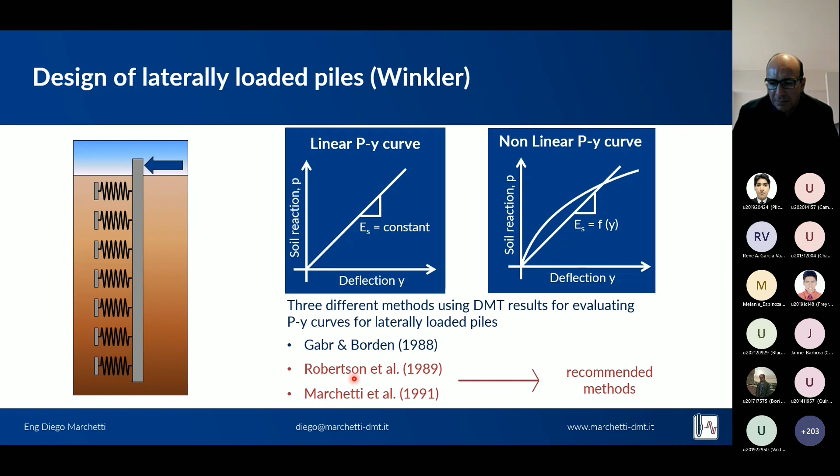There are several methods for estimating the PY curves. The first one was published by Gabr and Borden. You can find the publication even on our website.

Then two additional methods were extended by Robertson and Marchetti, and these are the two recommended methods. The Robertson method is for both clays and sands. He did an adaptation of the PY curves with laboratory soil properties obtained and inferred from the DMT. The method from Marchetti is valid for clays only, and it's a straightforward procedure for deriving PY curves directly from the DMT, bypassing the step of estimating laboratory soil properties.

Just to show you the approach, basically the PY curve is obtained with Pu as a function of P0 minus U0 for the shear strength, and the stiffness is evaluated as a function of ED. These are the details that you can find also in literature.

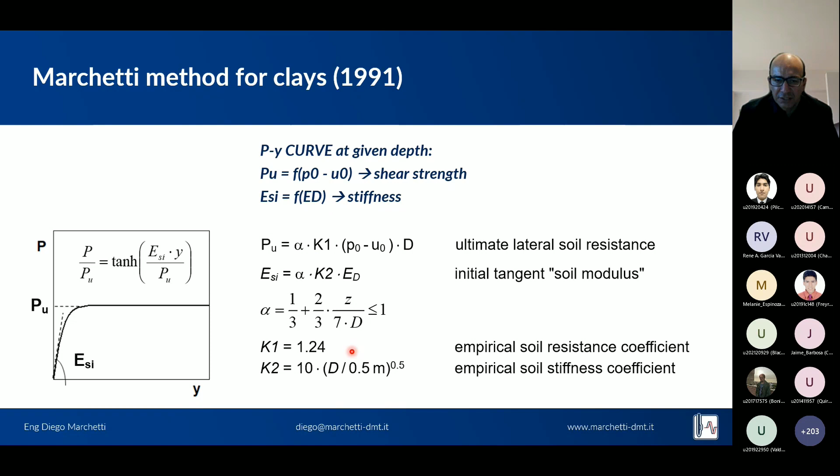Later published also by Schanz and Vermeer, they recommended for the hardening soil model to use E50 ref equals E-odometer ref equals the modulus MDMT, whereas for the E unload-reload, you can use 4 times the modulus MDMT.

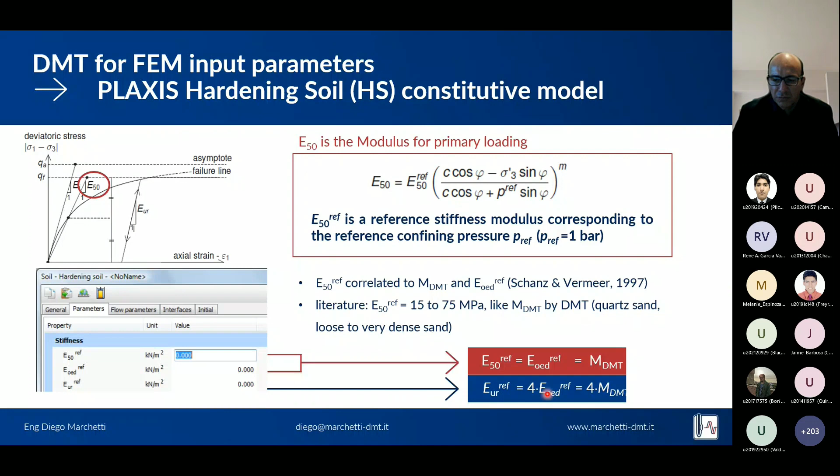This methodology was used more recently and published in this very nice paper by Di Mariano for the excavation of a train station in Barcelona for the high speed line. They did a good modeling, a very interesting modeling with Plaxis of the soil parameters, employing the modulus from the DMT.

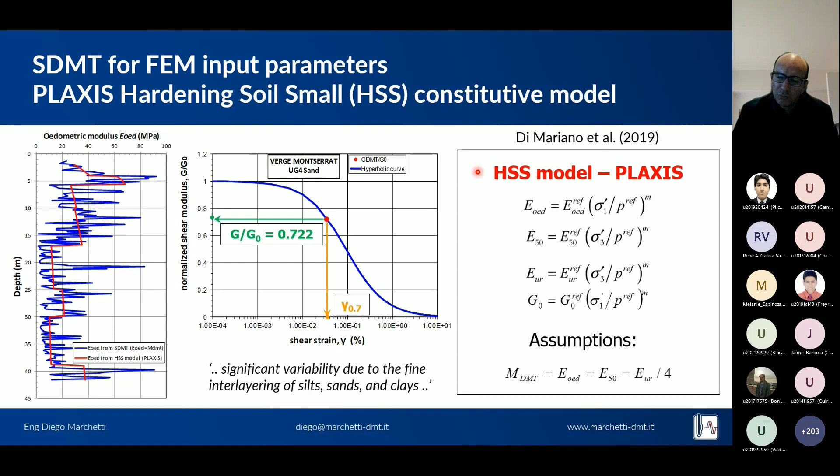Basically, they approximated because there was significant variability due to the fine interlayering of silts, sands, and clays. So they used this approximate red profile. Then with the laboratory, they were able to assess the G over G0. They used these expressions here for the input of the hardening soil small constitutive model. If you want more details, read this publication.

Now, it is well known that OCR and aging have a strong influence on CRR. Aging in sands also has a strong contribution due to chemical factors like post-sedimentation cementing bonds at particle contacts, and also mechanical factors due to the slippage of grains during secondary consolidation.

It is definitely necessary to account for stress history and aging to obtain reliable results for liquefaction resistance. The correction factors depend also on the age of the deposit and are site-specific.

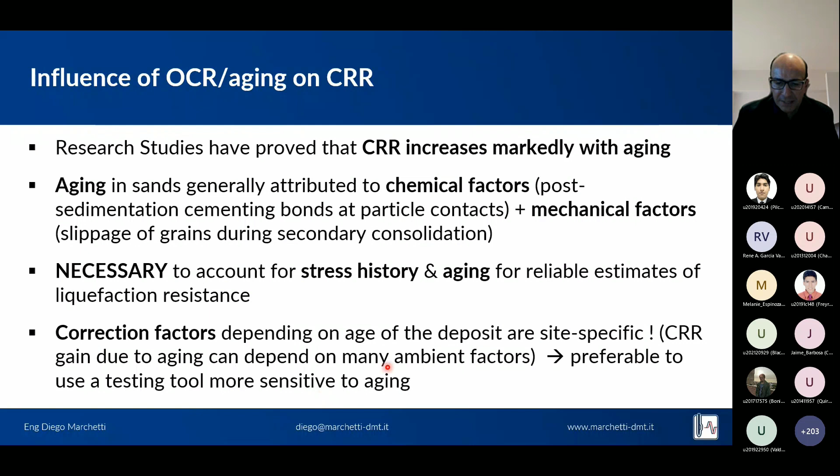Since there are so many factors, it is good and preferable to use a testing tool more sensitive to aging to estimate CRR. A major obstacle for laboratory testing is to obtain undisturbed samples, because unless you use very non-routine sampling techniques, which are also very expensive, like ground freezing and gel push sampler, it is difficult to obtain undisturbed samples, especially in sands. Also, the adequacy of using reconstituted sand specimens, even if reconstituted at the same in-situ density, is questionable because of the in-situ fabric, cementation, and aging affecting CRR.

So in 2004, there was a panel discussion at the Geo Congress where a large group of experts, maybe the most experts of the world, concluded that no laboratory tests are suitable for liquefaction estimation. Only suitable field tests should be used. Now, most of the liquefaction resistance is done with SPT and CPT, yet with very cautious recommendations.

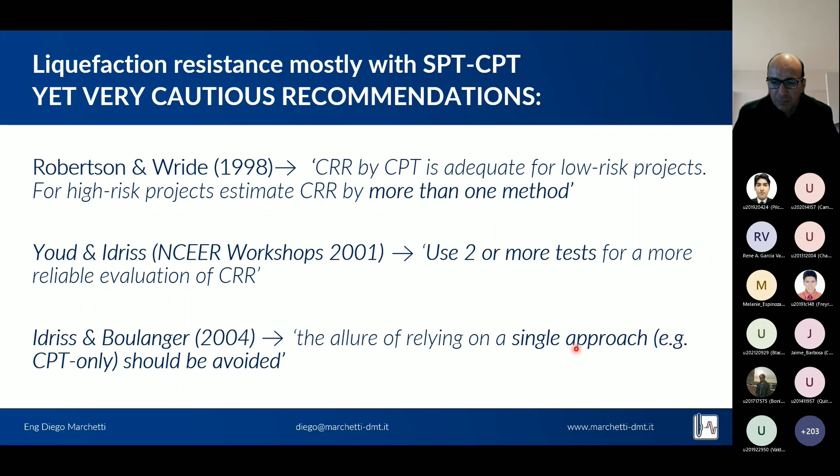Robertson and Wride said that CRR by CPT is adequate for low-risk projects. For high-risk projects, you should estimate CRR by more than one method. Youd and Idriss added that you should use 2 or more tests for a more reliable evaluation of CRR. Idriss and Boulanger underlined that the allure of relying on a single approach should be avoided.

So for this reason, we decided to use the DMT data for obtaining an additional estimation of CRR. Now, published research pointed out that KD is quite sensitive to stress history, as I showed you in the last slides, including aging, pre-stressing, and structure. KD is also correlated with relative density and in-situ state parameters, even though I did not show you this correlation.

And these are all factors known to have influence on liquefaction resistance. KD is like a cumulative index that takes into account all of these properties and basically gives a performance of the soil increased due to possible cementation, pre-structure, pre-stress, and so on. So this is to explain why CRR was obtained from KD.

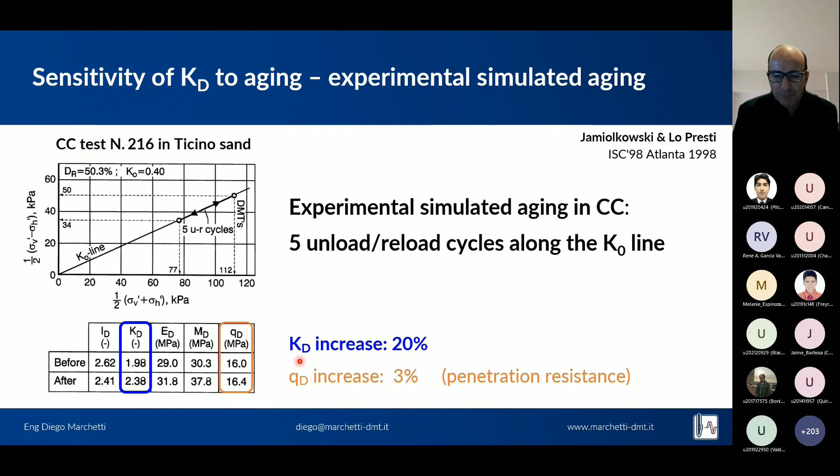Also, this experiment further tells us why KD was chosen, because in this experiment published by Jamiolkowski and Lo Presti, they used the Ticino sands and did 5 unload-reload cycles along the K0 line to simulate pre-stressing. And then they did the test before and after this simulated aging. They saw that KD incremented 20%, whereas the penetration resistance increased only 3%. So KD proved to be very sensitive to pre-stress.

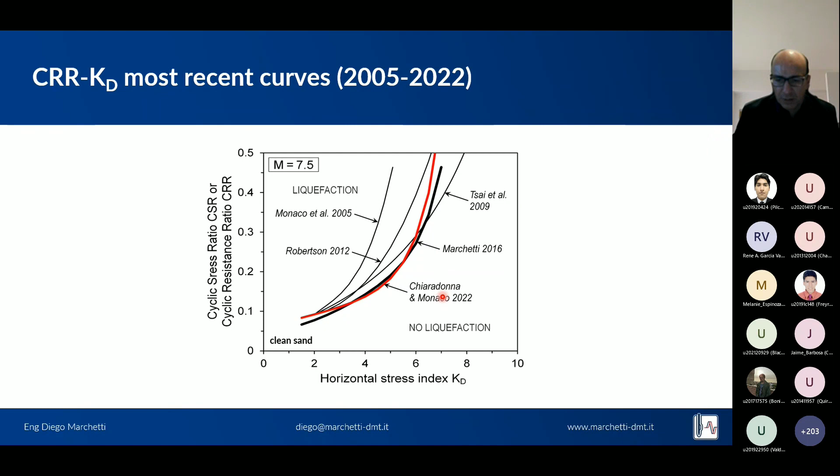So the idea with the SDMT is to obtain 2 independent evaluations of CRR, one from KD using that latest curve I showed you, and putting the points and seeing if there are points on the unsafe value, which is on the top left, or on the safe value, safe from liquefaction, on the right bottom. A similar estimation of CRR can be done with VS, again using the curves proposed by Andrus and Stokoe, which have a small difference according to the fines content. So these are two independent evaluations of CRR.

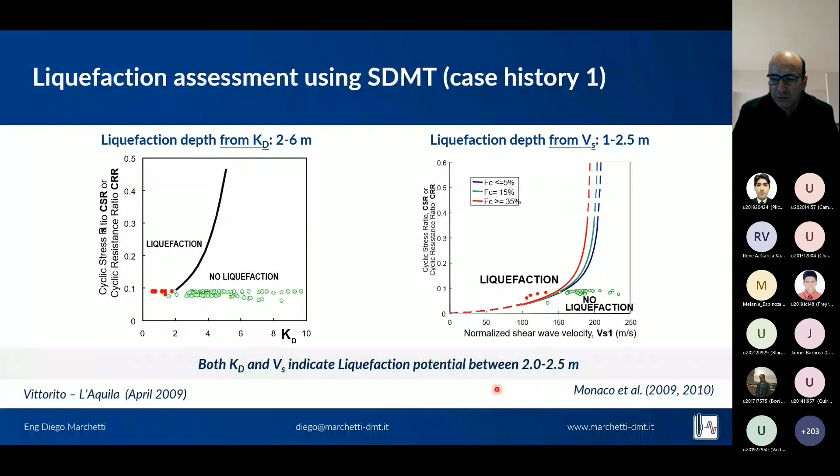They had all the data reconstructed, back calculated these parameters with the local university, and they did several SDMT tests. They then plotted both the evaluation of the liquefaction CRR versus CSR, and you see that there are some red points between 2 and 6 meters with KD, and from VS there are points between 1 and 2.5. So probably the liquefaction was indicated by both independent methods between 2 and 2.5 meters, so probably it occurred in these layers.

Another example was published by Vargas and Coto in this area in Costa Rica, Pez Vela, where they protected the marina with coffer dams, basically containers with sand that was not compacted.

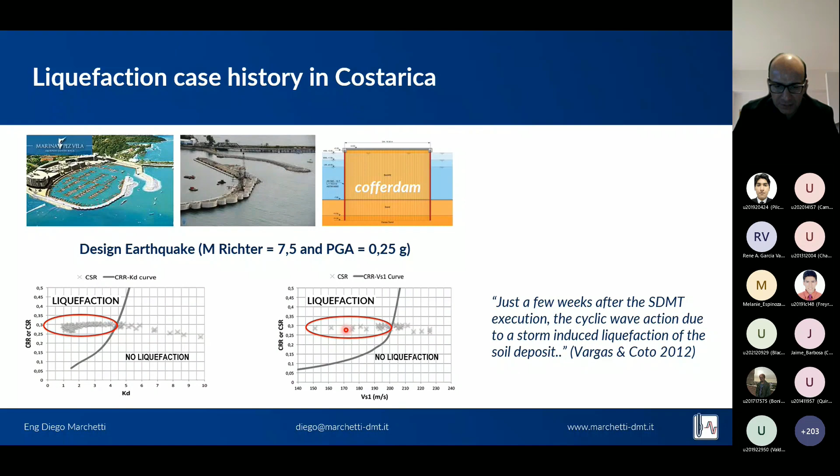They used the design earthquake values for plotting the CRR, CSR curve. And as you see, there were many points indicating potential of liquefaction. They wrote that just a few weeks after the SDMT execution, cyclic wave action due to a storm induced liquefaction in these deposits. Of course, we have to check if the storm was in line with these parameters, but definitely the risk was well pointed out with their analysis before the storm.